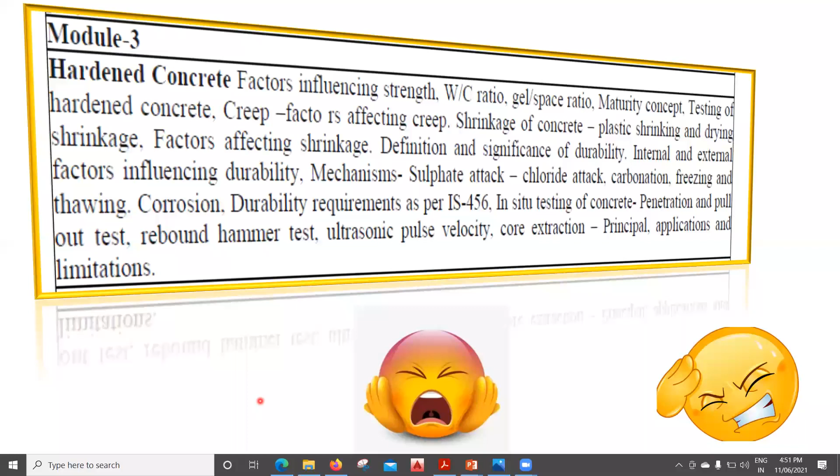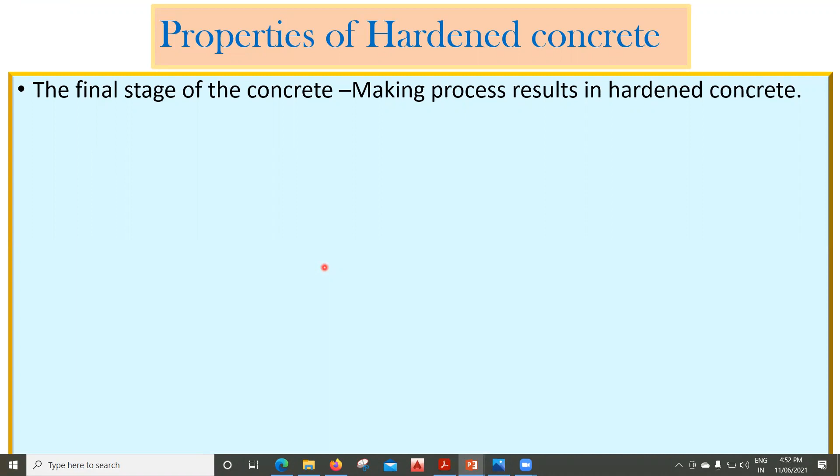Now coming to the properties of hardened concrete. So the final stage of the concrete making process results in the hardened concrete, because so far what we had seen was about the fresh concrete, right? What is the care that we need to take on the fresh concrete and all. So once you place the concrete, it is slowly going to gain the strength, and once it gains the strength, it becomes a hardened concrete. So in this stage, the surface of the concrete cannot be worked by applying the pressure. So the following are the important properties of the hardened concrete.

The first is about the strength. So how do you determine the strength of the concrete? We have different tests, like I mentioned. We have a compressive test, where we'll try to see what is the compressive strength of my concrete, because we know that the concrete is strong in compression and it is weak in tension. Then we have a tensile strength. So we'll try to see how the tensile strength test has to be done. And we'll also try to see what is the flexural strength of my concrete, how those experiments have to be carried out, and also the bond strength.

The next is about the durability, right? So durability is also an important factor. If you have only strength in your concrete, that is not going to help you. Along with the strength, we need to have the durability. That means how long my concrete structure can last, right? So that is called as durability. For example, whenever we do the construction, we give these cover blocks, right? These are the cover blocks for the column, which we give 40 mm, and this is a cover block for the beam, which we usually keep 25 mm.

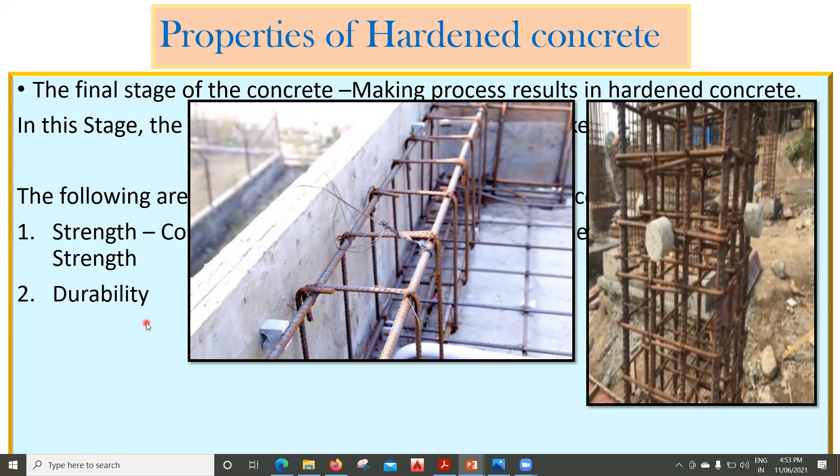So what it's actually doing is not allowing my rebar, this reinforcement bar, to get exposed to the atmosphere. As a result of that, there won't be any problem in my rebar. Just in case you're not giving the cover block, and this rebar is exposed once you pour the concrete, then it will come in contact with the air, and as a result there will be corrosion, and this corrosion will make the strength of my concrete structure come down. That means the durability of my concrete is going to come down, right? So this is another property of a hardened concrete.

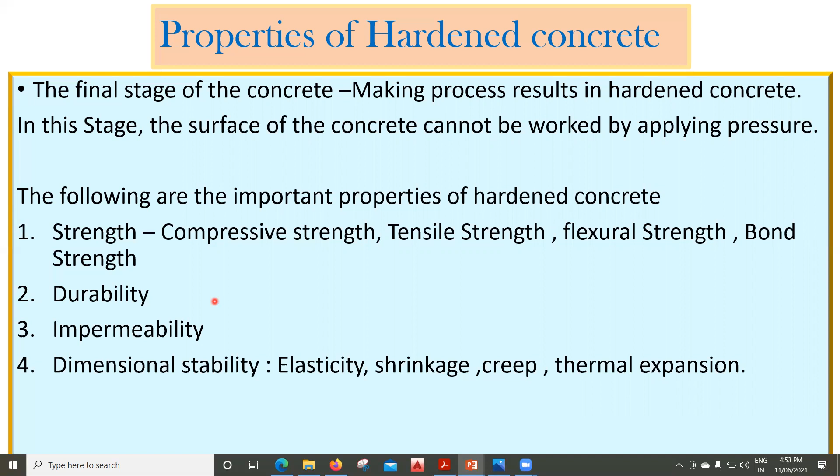Then the next one what we have is the impermeability. That is, how strong my concrete is able to resist the ingress of the water, which is called as impermeability. Then we have other important factors like the dimensional stability, that is about the elasticity. Then we have shrinkage, then we have creep, and the thermal expansion.

So these are the shrinkage cracks what we can see once you place the concrete. If the surrounding temperature is very high, the chances of water getting evaporated is more. And if the chances of water getting evaporated is more, then there will be cracks. That means the concrete will try to shrink. As a result of that, the cracks are going to form there.

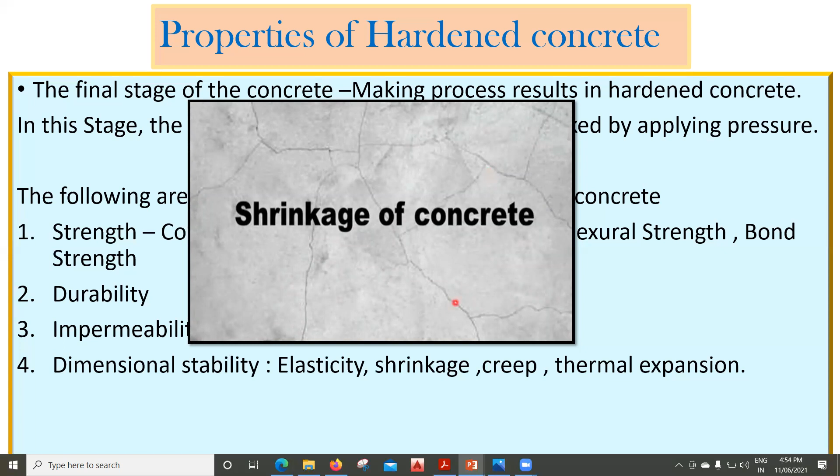So these are the shrinkage cracks what we get. So this all comes under the dimensional stability. We need to understand all these things one by one, right?

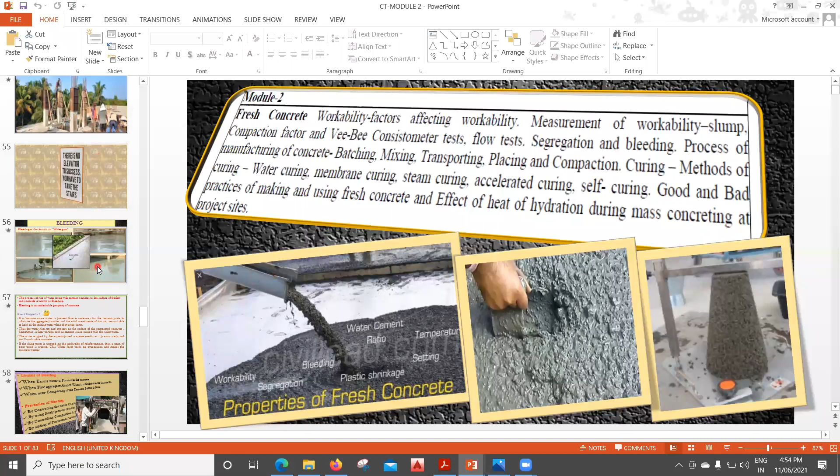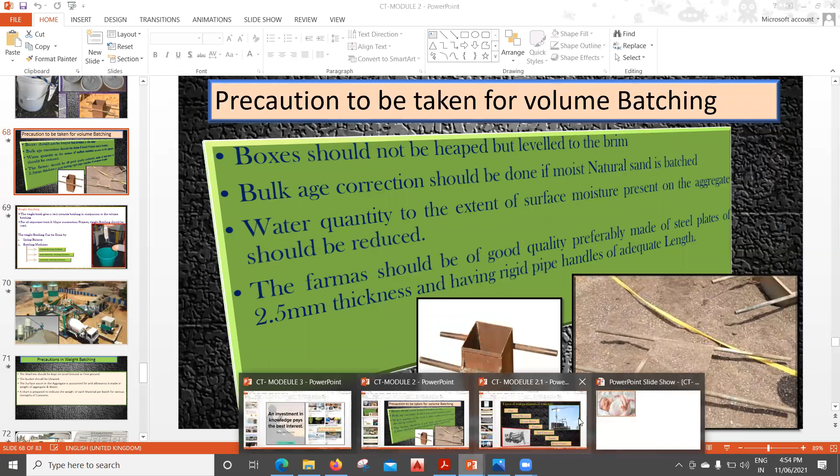So far what we had seen, if I go back, we had seen all the fresh properties of my concrete, right? So how the concrete has to be prepared, how you have to place them. We have understood how the batching of a concrete should happen, and what are different ways of preparing the concrete and all. And also after that, finally we saw how the curing has to be done.

Yeah, give me a minute.

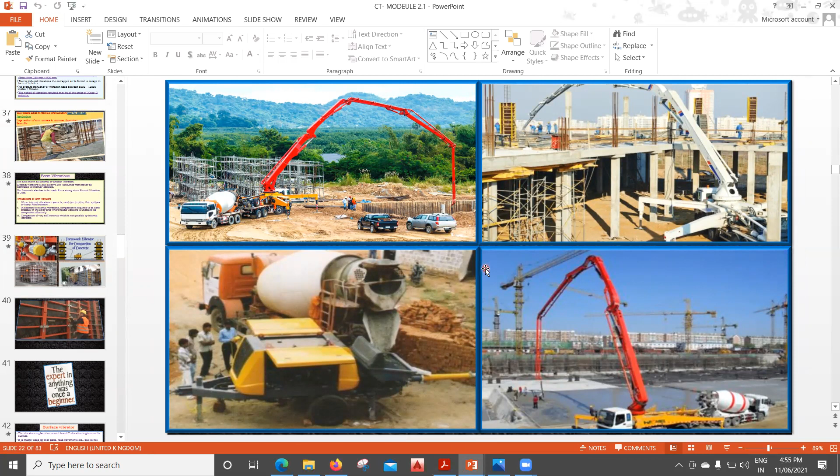Yeah, how the curing has to be done, and how you're going to place the concrete with the help of these machineries, and compaction, finishing, everything is done. So all this we were doing on the fresh concrete. So once the fresh concrete is done, next we need to understand about the hardened concrete, which we are actually trying to understand now. To put it in a better way, we'll try to understand this way.

So it's a newborn baby what we have here, right? Imagine this is a concrete what you prepared, it's a freshly prepared concrete. So just now the concrete is placed. So from here the maturity of a concrete is going to start. How it's going to start? So slowly, you'll try to cover that, right?

If you don't cover the baby, what will happen? You'll be having a surrounding temperature, the heat and all, right? So it is something related to durability. If the durability is good, this baby will not face any problem. It's something like the cover block what we try to give to the structural elements.

So then slowly my concrete, after few days, it's going to gain the strength. Like initially, as soon as the baby is born, it cannot take the strength on it. It requires some time. Slowly after some time, it's going to take your help, and it starts to move on its own. In the same way, the main intention of putting my concrete is it has to gain the strength, and it has to take the load which comes over that.

So let us say this is a 7-day concrete what I have. Let us say today I'm pouring the concrete. After 7 days it's going to gain certain strength, a little strength. After 7 days, usually what we try to look is after the 14 days. In 14 days the concrete will try to grow a bit, and it's able to take more load compared to the 7 days. The 14 days load carrying capacity of a concrete is going to increase.

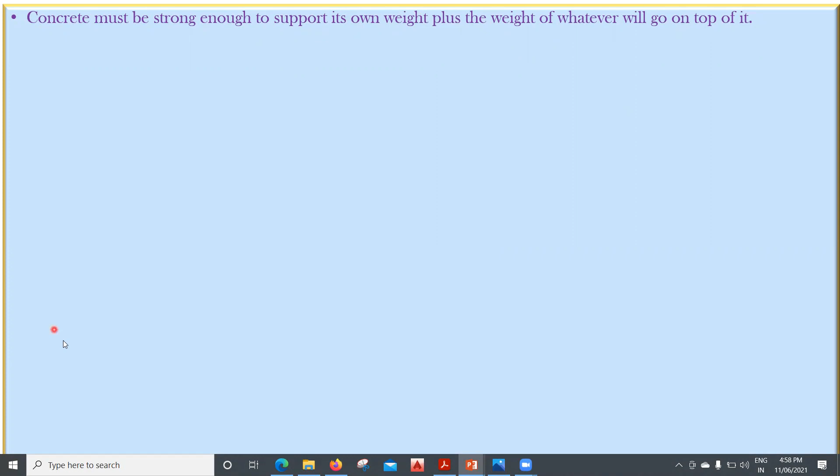All those things we need to understand. So the final thing we have is the concrete must be strong enough to support its own weight plus the weight of whatever will go on top of it, as we have seen here, right? It could be a building, or it can be trucks or people walking on it, whatever it may be. It has to take the load for which it has been put up.

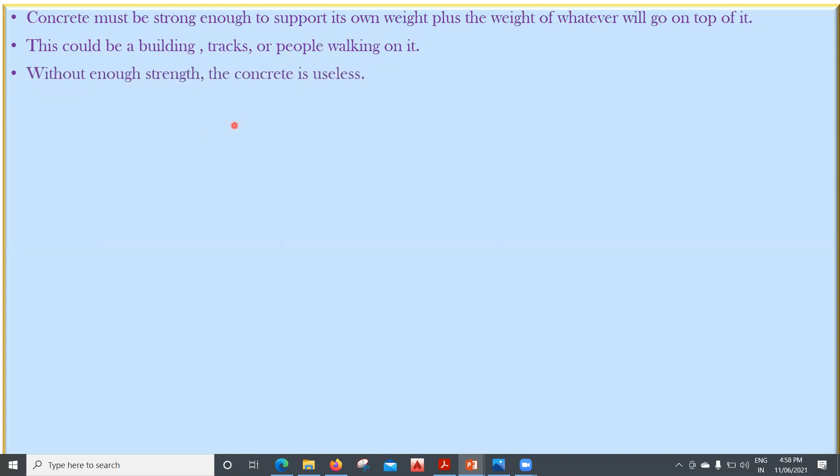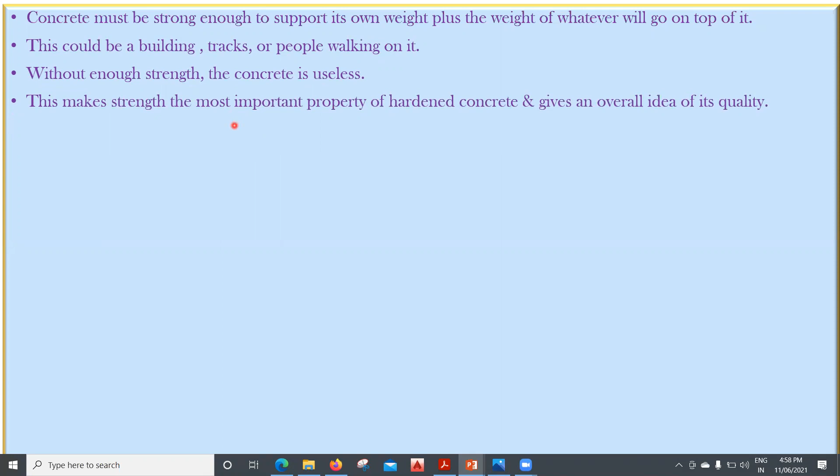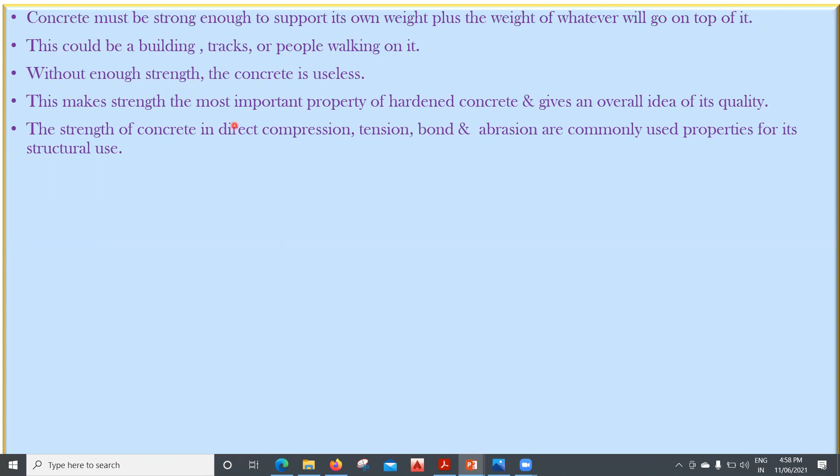Without enough strength, the concrete is useless to us, right? If the concrete is not able to gain strength, then there is no point in placing the concrete. This makes strength the most important property of hardened concrete, and it gives the overall idea of its quality. The strength of concrete can be measured with the help of direct compression. Tension, bond, and abrasion are the commonly used properties for its structural use. So these are the different tests we do.

So this is a compressive test. We prepare a cube out of concrete, and then we apply a compressive force with what is called a compressive testing machine, or you can make use of a universal testing machine also. We put a compressive force C and C, then we see how the cracks are generated and what the capacity of this cube is. This is how we do the compressive test of concrete, and we'll understand this in more detail as we proceed with the lectures.

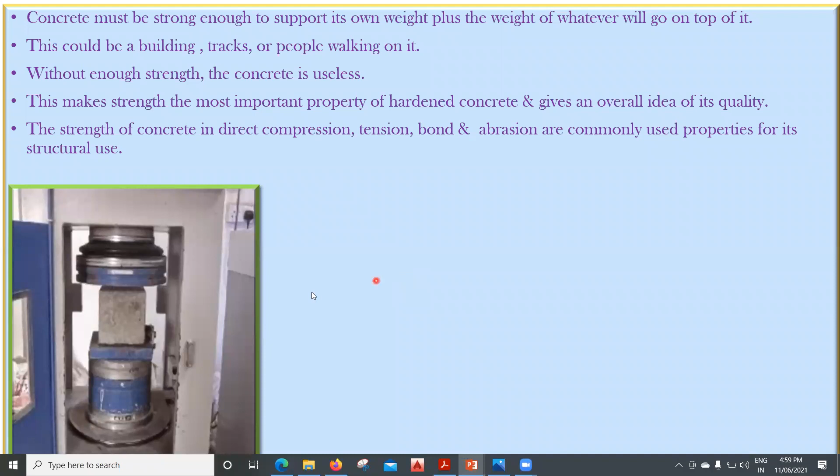Then we put reinforcement into this. We already understood that is the reason we go with RCC, right? So we put reinforcement into this concrete, and practically you might have seen rebar being put into concrete so that it is able to take the tension force coming on it. So we have to do this test also, that is the flexural tensile test.

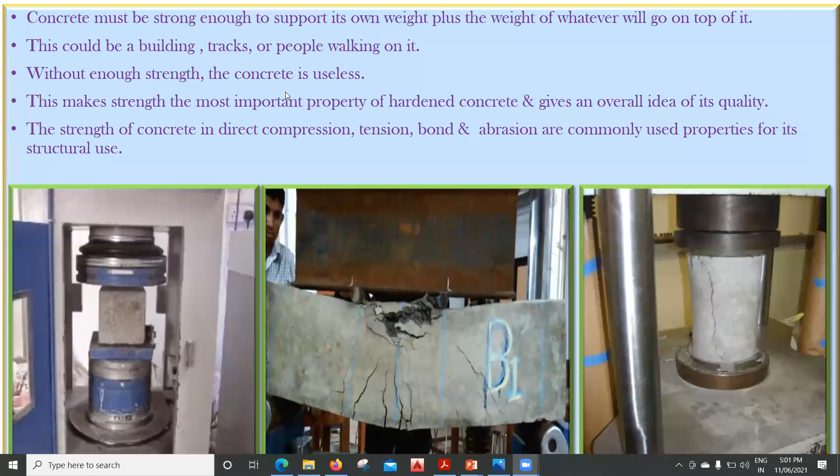And the last one is the split tensile test. If you put the cylinder the other way around, it becomes a split tensile test; if you put it vertically, it becomes a compressive test. Especially in India we always do the compressive test on the cube. But in the United States, they do the testing on the cylinder and don't use the cube. The test on the cube always gives a better result compared to the cylinder, and we'll see the reason behind that, why in India we do the cube test and in the US the cylinder test, in the upcoming lectures.

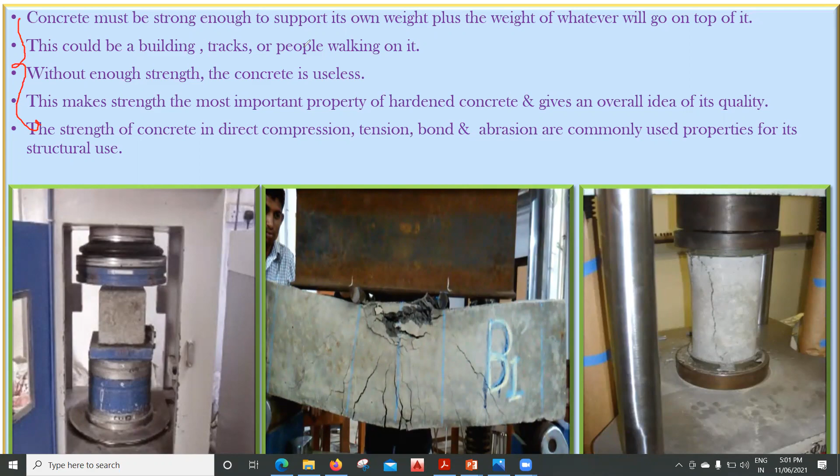So it was just a kind of introduction, so that we get a better idea of the different properties of hardened concrete and how they have to be understood. In the next lecture we'll take up the factors affecting the hardened properties, and we'll try to understand them one by one.